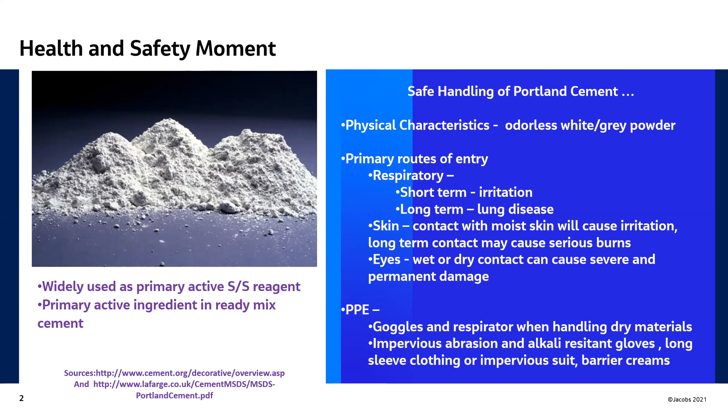So the main issue here with a dense aqueous solution is you don't know where this is going to upwell. You can almost think about the preferential flow paths being like blood veins. The challenge with this project was essentially that you could move 5 feet over and go from basically clean, from an arsenic perspective, to screaming hot with arsenic. So the variability of the sediments you'd be pulling up and putting into the scow, bucket by bucket load, was tremendous.

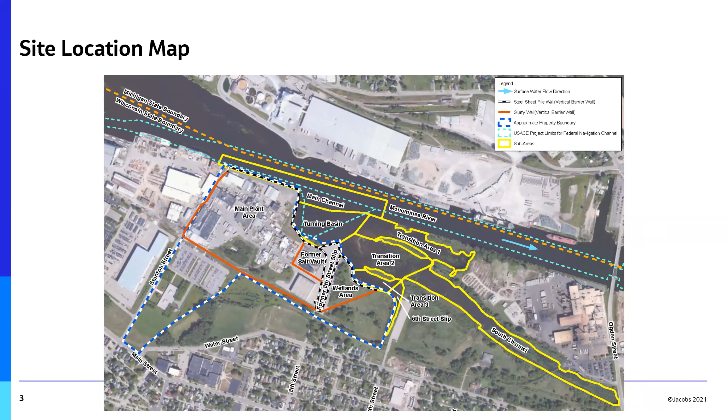So how do you effectively manage that in a remediation project where you're trying to take arsenic-impacted sediments, bring them to the dock, dewater them - and because we're very congested here, this was about 1.5 acres - export these to a municipal solid waste landfill with a non-hazardous classification? What that means in the United States is that your toxicity characteristic leaching procedure, or TCLP value, is less than 5 milligrams per liter arsenic. We needed to achieve all of that in basically 72 hours to get that stuff off site to avoid additional site congestion. Part of the challenge with this, as I indicated earlier, was the variability.

So we had two main sediments that we were dealing with: a soft sediment, which had a lot of organic matter in it, and what we called a semi-consolidated material. Both of these were sandy, silty materials, but the soft sediment had twice as much organic material in it, and as a result, it was very concentrated in arsenic.

So you can see the quantities to be removed based on the bathymetry, where the soft sediment in the turning basin was about 43,000 cubic yards. In the transition area, it was about the same - I hope you can see my cursor here - 42,000. But look at the concentrations, right? Dennis, can you right click it and get that other pointer option, the laser pointer here? Yeah, there we go. Right, so in the soft sediment we had about 86,000 total between the two main areas.

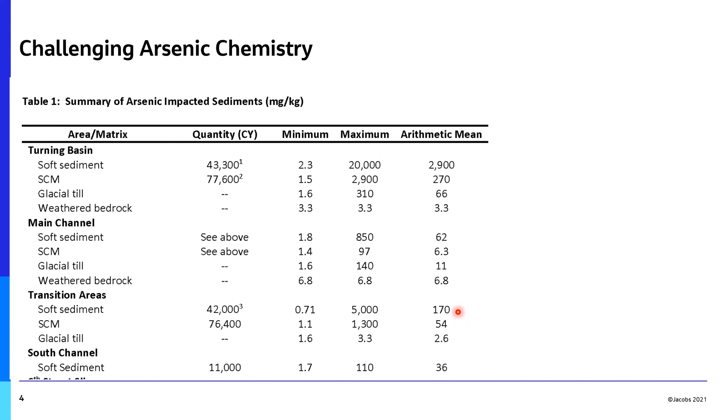The semi-consolidated material, which was more of a free-draining sandy material, had about 10 times less the contamination level. So you can see here, again, variability-wise, I have basically 2 milligrams per kilogram up to 20,000, with an arithmetic mean of 2,900. The transition area was not really that contaminated, but again, how do I know what I'm picking here? This was a really big challenge.

So chemically speaking, the two main active agents in Agent Blue were dimethyl arsinic acid and monomethyl arsonic acid. The solubilities of these were 2 million in the case of DMA, and in MMA it was 256,000 milligrams per liter. So I ask you, what are you going to do here when your TCLP limit is 5, right? These are enormous numbers. So it was a significant technical challenge to devise a method to get below 5.

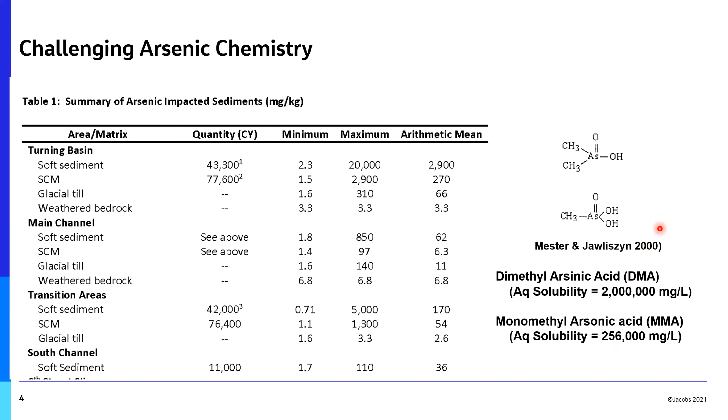So let's take a look at some of the physical and chemical properties of the very high moisture content materials, that soft dredge material. We picked 2 surrogate soils from an area called B6 and B4. They were almost liquid. The loss on ignition, which is an indicator of organic matter content, was 15 to 20. It was pH neutral, fairly plastic, and a lot of that had to do with the organic matter content because it classified as an SM.

But again, our average for this sample that we used for the treatability study was about 6,300 milligrams per kilogram. The B4 material was about 4,200. The semi-consolidated material, which was more of a well-graded sand or an SW material, these again were more freely draining, but yet you still had, even in a sandy material, up to 32 milligrams per liter TCLP.

In the case of the B6 material, you're about 34. So the challenge here is it didn't matter if you had a lot of fines or a plastic material or not, it was equally concentrated in both soil types. So you couldn't use just straight geotechnical characterization information to tell you what material you were dealing with and have that be correlated with the leachable characteristic on arsenic.

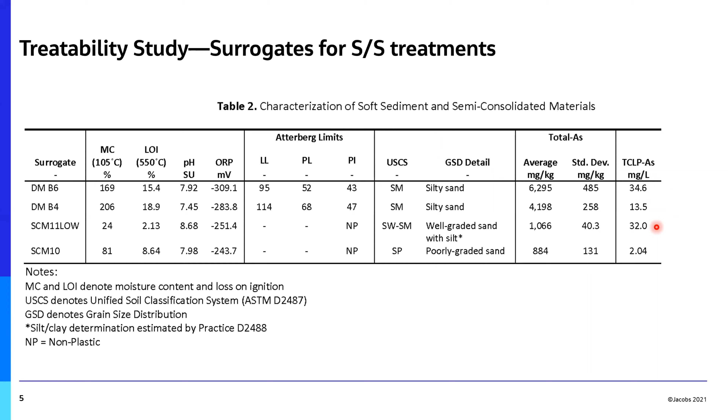So when you do a treatability study, what you need to do is mimic what's going to happen at the site. So if you don't model the site processes with your treatability study, you are going to end up with a solution that does not work in the field. I stress this to everybody. I lead a lot of treatability study work at Jacobs. And if I was to tell you the single most important issue that is always overlooked, it's making sure the treatability study mirrors the field processes. So what did we have to deal with material-wise?

The soft dredge material and our semi-consolidated material, both of these up to about 30 to 40 milligrams per liter TCLP arsenic. The site constraints, and this is where you transition from science to engineering.

We were only allowed to use 2 reagents because we needed a compact stabilization solidification system. We prefer dry reagents because we're obviously trying to dewater something with a moisture content north of 150 moisture points. We needed to ship the material off-site in 3 days, so 72 hours, to avoid congestion. We had 11 bins with 1,700 cubic yards capacity each.

And if you got out of cycle and you failed your arsenic criteria on those, the site backed up immediately. In fact, the site was completely shut down because all the bins were contaminated when they exceeded the TCLP limit when I joined the project. So the idea is to get that off-site as fast as you can.

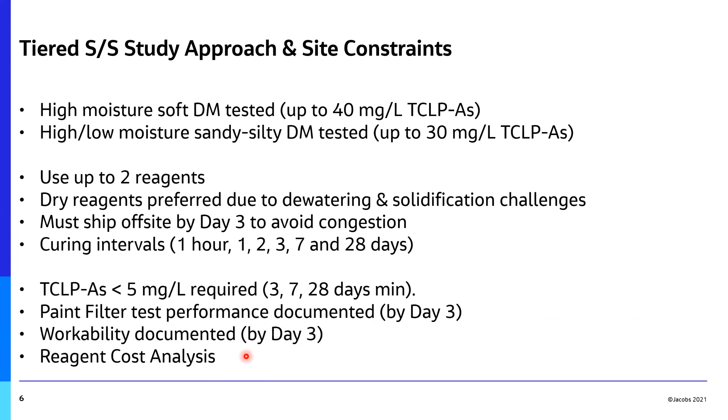And then the other thing that we had to do was track the dosing and the actual reagent unit costs with our dosing strategy. So the arsenic immobilization strategy, which was first and foremost, was that first we needed to understand what was happening in terms of the overall Eh, pH, stability of arsenic, right? Because we needed to ensure that it was going to remain immobile for the long period.

And what we realized is that the leading strategies for arsenic immobilization actually have combinations with iron. So when we superimposed iron speciation on top of this, what we realized is that we needed to be in this crosshatch region to immobilize the arsenic for our site considerations, which meant that we needed to be oxidized and we needed to be between pH 4 and 8.

Usually when you're working with a stabilization solidification system and you're adding cement, you're way over here in the pH 12 and a half to start the reactions. And for long-term stability, for most projects, you want to make sure that your pH is maintained above 10. That wasn't going to work on this project. And in fact, I will show you mix designs where we started with an initial TCLP of 40, and because we didn't get our pH right and we were strongly alkaline, we in fact doubled up to 80, which is no bueno.

So in terms of looking at reagents that we're going to be able to dewater a highly liquid material and to have combinations with iron and also sulfur, which is known to immobilize arsenic, we looked at probably 30 to 40 reagents. These are the top reagents that are listed here, and they appear in the papers in ASCE. And the key here, again, for tracking the reagent unit cost is, some of these, this one here, this EnviroBlend was $600 a ton.

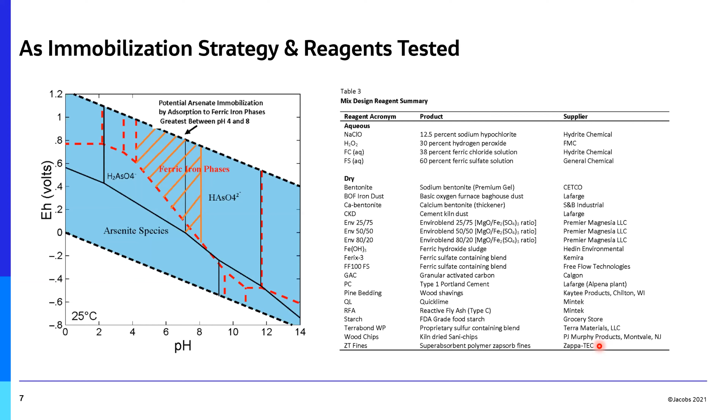Some of these others, this polymer-based thing is about $1,400 a ton, but you only need 1% of that in some cases, depending on your project. So you have to look at the reagent dose, right, times the unit price to track the cost. And that's what we had to do. So, again, challenging material, and we did probably 200 plus mix designs to nail down the immobilization of this arsenic and to find cost-effective solutions.

I wish I could hide this stuff at the top. How do I do that?

Because the key is up here, and what you see is we have our moisture contents that we're tracking in the leftmost column. We have our reagents, again, limited to 2, and our priority was to be adding iron into the system, and then if we needed solidification, to begin adding things like Portland cement. And then we track the paint filter,

ORP or Eh, pH, the TCLP fluid we were using, the ORP during TCLP, the TCLP pH, because that's the regulatory criteria, or one of them at any rate, the TCLP arsenic, right? And so green means you passed, red means you failed, and we needed to track that. We tracked it at 1 hour, 3 days, 7 days, 28 days, and then I'm showing you the reagent unit cost in the rightmost column. So let's take a look at a couple of these.

So here, we're adding aqueous ferric sulfate, which seems odd. Why would I add a liquid to immobilize a liquid? But in fact, all the iron is in solution. Dry reagents typically foul. So delivering and having iron in solution to react with that soluble arsenic is important, right? So in high water content stabilization challenges, we're often adding our reagents in aqueous form to enable the immobilization reaction to occur, precipitation, sequestration, etc. Then we have our Portland cement.

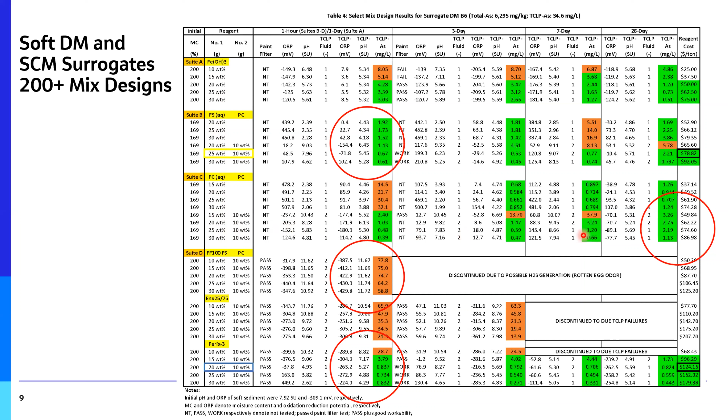What was also quite interesting was we used ferric chloride, which is from the steelmaking process, right? And that is also an iron acid with lots of iron in it. And so it was comparable to the ferric sulfate, but actually cheaper. So we ran that through the system. And what we found was, in fact, that was actually more cost effective, but you have to pay attention to the workability. And so let's talk about that for a minute.

When you're working with complicated systems, you need to have hands-on experience or somebody that you trust that is working with those materials, that is paying attention to how these systems are evolving. If you don't, you're going to pick something that doesn't work. Here is the ferric chloride. The fill line on the sediment was probably about 500 grams. We put that in there with the 30% ferric chloride, and it began oxidizing it and swelling it and poured over the edges, right? It turned the stuff into mousse, right?

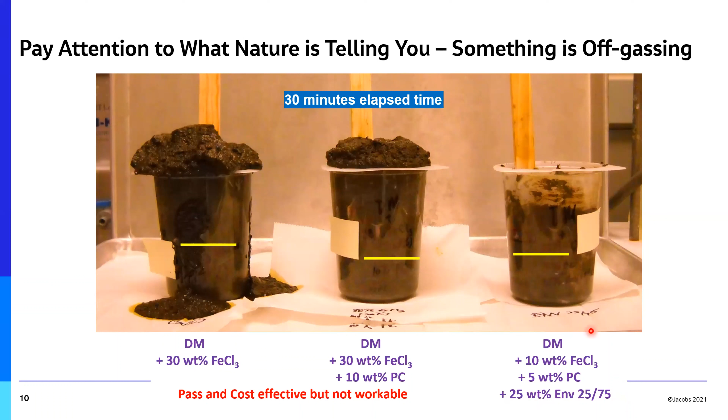We also looked at, because it was so cost effective, it with the Portland cement. That was still swelling to about 3 times the volume from its initial volume. And so that was rendered not workable either, right? Because how are you going to get this stuff off site? This was like a mousse. You couldn't handle it. By the time we actually got it to be a solidified material that was actually workable, we broke the bank on exceeding the number of reagents we had to use. So this got kicked out, even though it was the most cost-effective one there, but it wasn't workable.

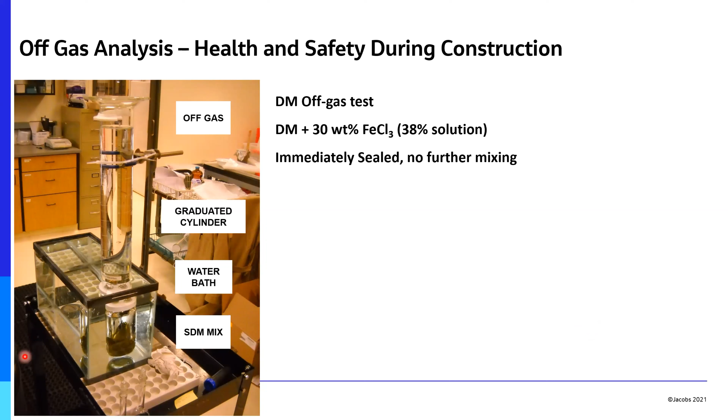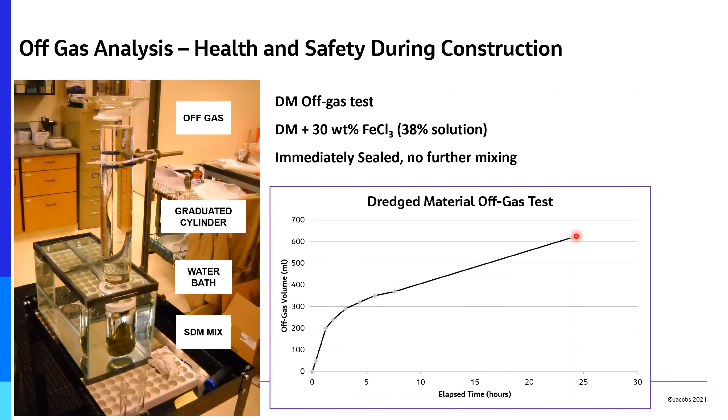The other aspect that we had to understand is, because it was ferric chloride, were we generating chlorine gas, which is why the site originally got shut down, because they were using hypochlorite to oxidize the arsenic. So here we looked at an experiment of again putting 500 grams of the SDM mix in a jar in a water bath. We looked at the off gas of that into a graduated cylinder. And at 500 grams, we were basically creating the same amount of gas volume, a little bit over 600 in this case, within a 24-hour elapsed period. So that would have meant that all the SDM sitting in the bins and going through the pug mill would have been generating chlorine gas potentially and shutting the site down.

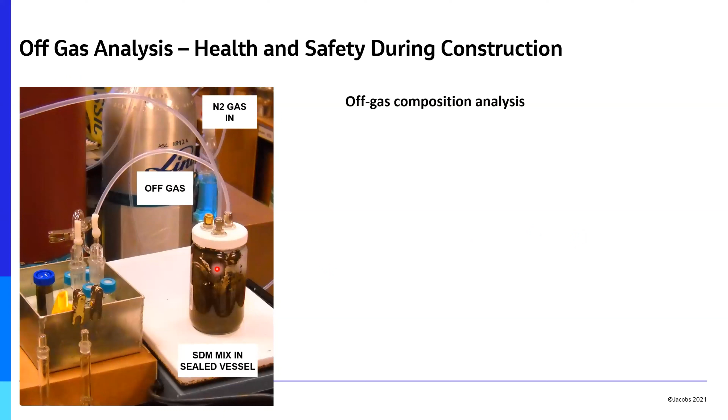When we actually analyzed what was going on here and the quality of that gas, we put nitrogen gas into the reaction vessel, we put the off gas through impingers to scrub it, and then we analyzed that. What we actually found was, in fact, we weren't generating chlorine gas. It was basically non-detect. That ferric chloride was so aggressive, it was oxidizing all the organic material in that dredge material, and in fact rendering it unworkable. We turned something that was a silty sand material into basically a mousse or a whipped cream that was no longer workable. So again, as I said, if there's anything you take away from this, make sure you're paying attention to what's happening to the materials as they react.

All right, so now we said, okay, because our SDM had different characteristics from our semi-consolidated material, we wanted to come up with conservative doses based on those materials and the expected concentrations of arsenic that may be in those. So we selected a dry mix, ferric sulfate source, and the wet mix.

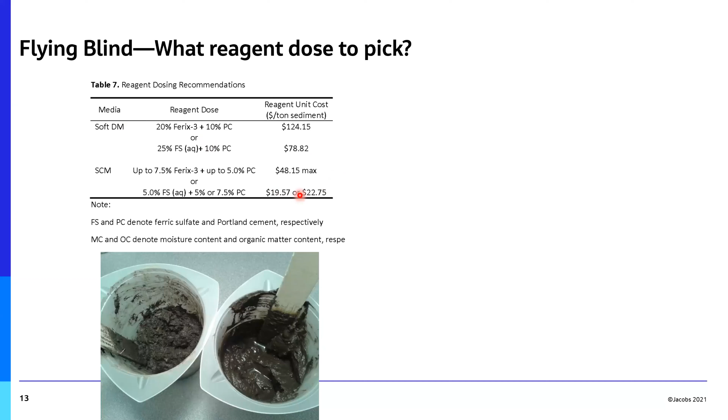But you can see here, depending on what you're going to get in the scow, you have a price between $19 and basically $124 per ton. And so when you run the numbers on that, we were going to treat 232,000 cubic yards or 348,000 tons of material in 2013 at a rate of 2,000 tons per day. So that was about 4 to 5 scows, 24/6 operations. So each scow is 500 cubic yards, and it can be highly variable in terms of what's in that scow.

Each storage bin was 1,700 cubic yards. If you failed a bin based on 3 TCLP tests on that 1,700 cubic yards, to empty out that bin, retreat it, put it back in the bin was $200K. If you then failed a second time, you had to go to hazardous waste disposal at $750,000 for that 1,700 cubic yards. So significant penalties here if you did not get your dosing right and immobilize arsenic the first time.

So, we were thinking we'd be using this Ferix-3 at 10% the whole time, or the aqueous one, but the problem was when you ran the numbers out, that was almost $27.5 million in reagent cost alone. I haven't paid for one guy, one piece of equipment. That's just the reagents. No landfill tipping fees, right? Just reagents. So what could we do to control that reagent unit cost?

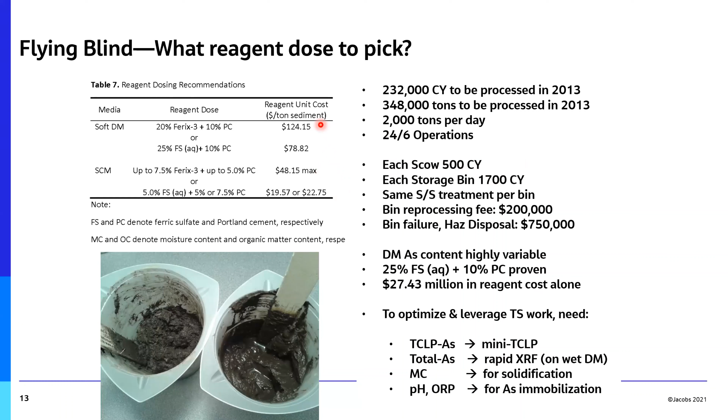So we devised a mini TCLP that we could use on-site with an on-site lab and do a rapid turn on that, so that in the decanting period, which was 6 hours for each scow to let the water come off, we would have a result and be able to say, hey, this is what dose you should apply to that scow on a real-time basis. So how did we do that?

The important thing to recognize here is that with sandy, silty materials that are natural in origin, or glass-like, or high in aluminum silicates, and not clay, these materials have very little buffer capacity. I actually picked up on this idea from Paul Lear, who works for a stabilization solidification company, because he was looking at lead leaching out of crystal, and he ran an acid extraction test very quickly and found that because glass has no buffer capacity, your pH after about 1 hour is actually the same as your pH at 18 hours. So all we had to do was rapidly acidify this material and then track the arsenic with time.

And what we found was, for the soft dredge material and the semi-consolidated material, in an hour, with the soft dredge material, I had virtually the same pH that I would if I ran that test for 18 hours. Well, that really condenses my time frame and allows real-time processing. The same thing happened on the SCM low. In fact, the numbers ended up being conservative on both of those. So that seemed to be the way out of the woods.

So again, looking at the analytical tests here, full TCLP with digestion or in a screening mode where you don't do the heating for the analysis, those were going to take 20 to 22 hours. That was not going to work because then we'd have all these scows sitting out on the water, not able to be unloaded. And if you sent that out to an external lab, you're talking about a 3-day turnaround time in your analytical data. That was not going to work.

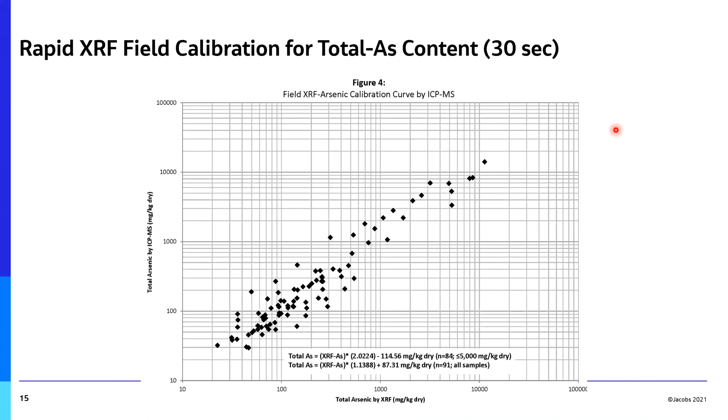For the XRF, we took a handheld device and calibrated that against the totals by the official procedure, and we came up with a calibration line. So now we know what the leachability is, we know what the total is, and this helps us, in addition with moisture content data, to figure out whether or not we have soft DM or semi-consolidated material, and we can begin dialing in or ratcheting down our dose to make things more cost effective.

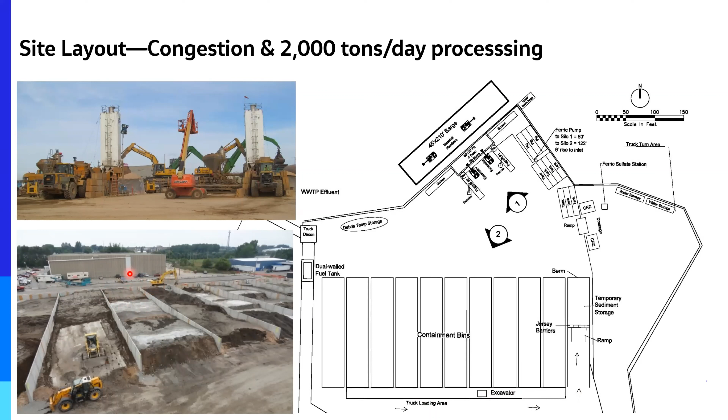So this is the backside. This is looking at the two excavators unloading. This is the pug mill system, and this is where the solidified solids come out, and then they are taken to the storage bins, each one of those being 1,700 cubic yards. What you see in the background is an excavator sitting on an elevated platform that can reach back into that treatment cell, take the material out, swivel around 180 degrees to the opposite side, and put the material into a truck.

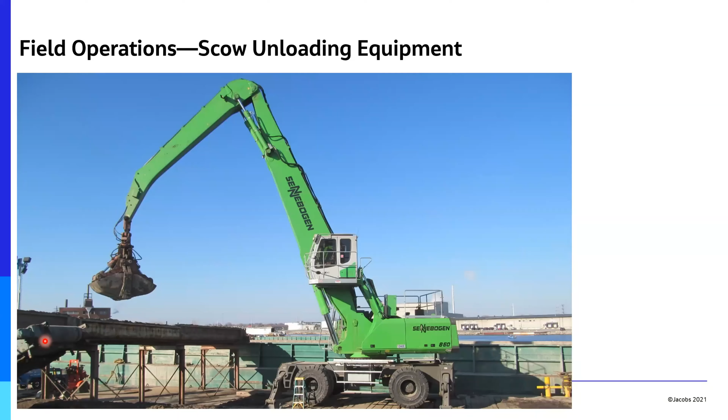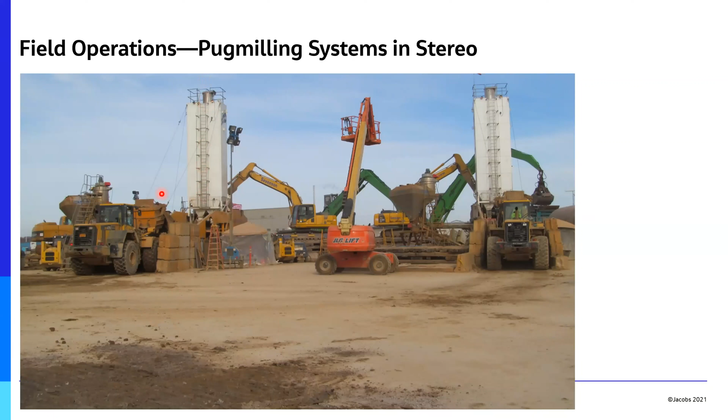So let's take a close-up of some of the equipment used here. This is a Sennebogen materials handler. This is what emptied the scow into our screening system and trash rack system before it went into the surge tank for the excavators, which are sitting here. They take the material out of the surge bin and drop it into the hopper for the pug mill. Here's your cement silo. The ferric sulfate came in on a different line; you can't see that here. And then these loaders took the material out.

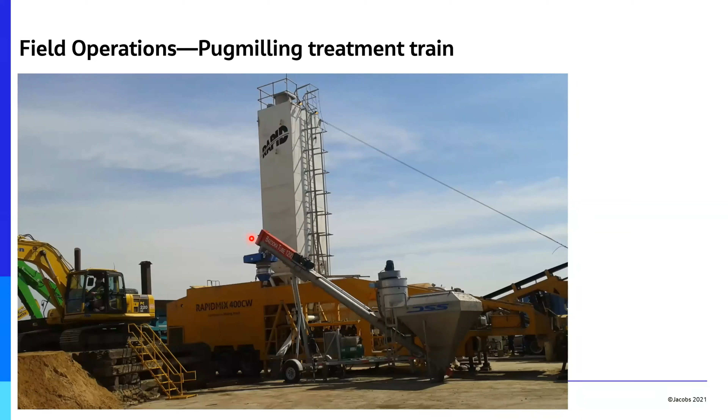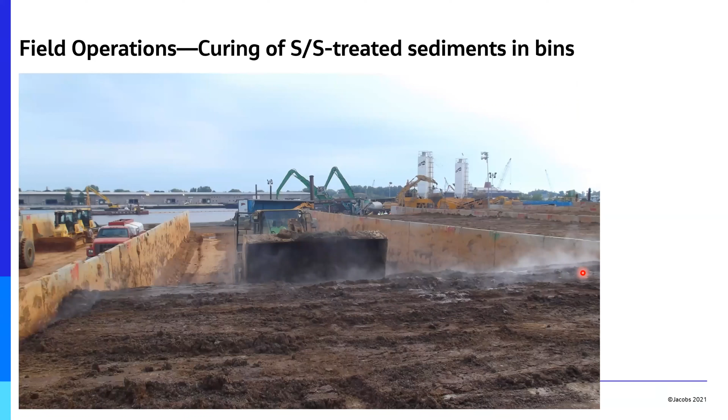This is the device that put in the ferric sulfate, the dry mix. And then here is a loader filling up a bin. This is steaming because the ferric sulfate, in combination with Portland cement, is very exothermic. So it's driving off a lot of moisture at the same time it's immobilizing the arsenic.

Now, here's the bin with the impacted material on the right-hand side. The excavator swivels around to the other side and fills up the truck that's going to the landfill. So it fills it here, then it goes through a truck wash system before it goes off-site to the landfill.

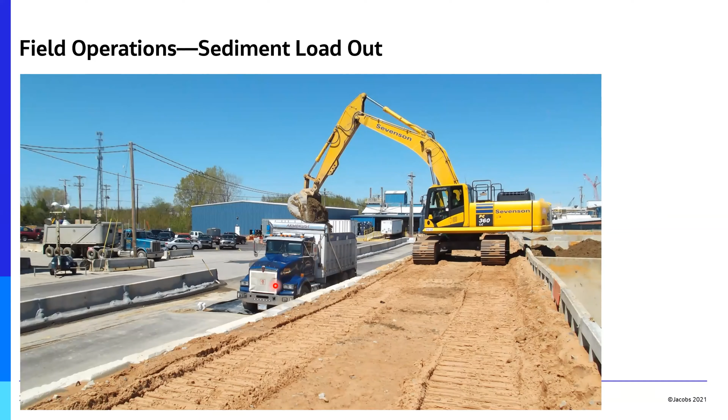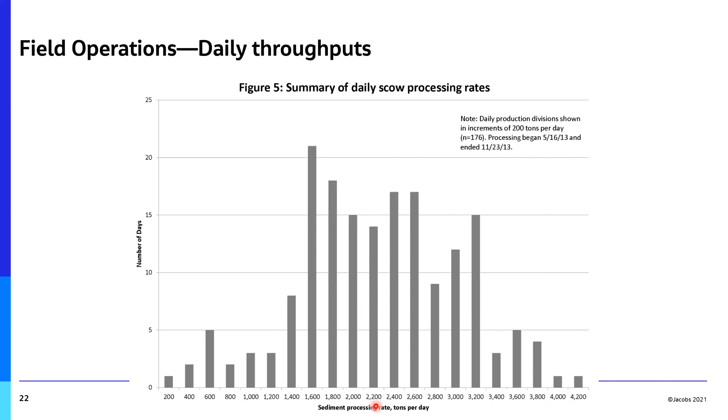So let's take a look at our processing now. Here what you see is we were working between basically mid-May to late November. And this is the number of days that we had various different throughputs. Our minimum was 200, probably a bad day, rainy, not able to process or solidify, up to some days moving 4,200 tons of material. That would have been basically 8 to 10 scows, which was a phenomenal throughput. But usually it was 1,600 to 3,000, probably an average of about 2,000 to 2,400 a day.

So very good throughputs. So how did we actually do our dosing? We've got these scows coming at us. They're going to decant for 6 hours. What can we do in those 6 hours to figure out how to dose that, get it through the pug mill and into the storage bin to start drying out?

So what you see here is this particular scow, scow number 29. We pull our 10 QA samples from the scow. We do the moisture contents. We do our XRF to get our total arsenic. We do our Mini-TCLPs in the on-site lab and get those averages here.

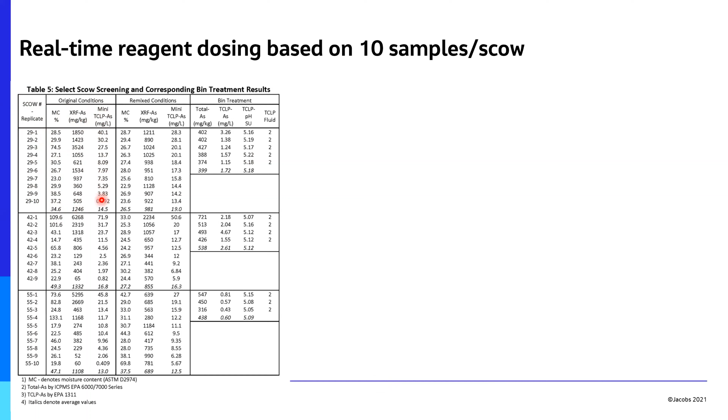As you take a look at this first one, we had moisture content from 23 to 75. Our totals were about 360 to 3,500. Our TCLP max on this one ended up being about 40, but you have a huge spread in terms of your TCLPs. So we were concerned that with such variation, what we really needed to do was even things out. So we sent this to be rehomogenized.

So they remixed it, we retested it. Now our maximum is only 28, our minimum is 13, so our average is 19. Our average has gone up, but it's a much more uniform distribution of materials, including the totals, which are much less erratic. This was 3,500, now our top value is about 1,200.

So now on the basis of this, we treat it with 25% aqueous ferric sulfate, 10% Portland, and here is our bin compliance testing before exporting for the site. So you see that we had basically 3.26, 1.38. Our average ended up being 1.72.

But if you had one failure on this, it had to be reprocessed, right? So our pH is, again, right in the middle of our targeted range, about 5.2. So this was a pass. After we rehomogenized the scow, let it sit for another 6 hours, brought it back, retested.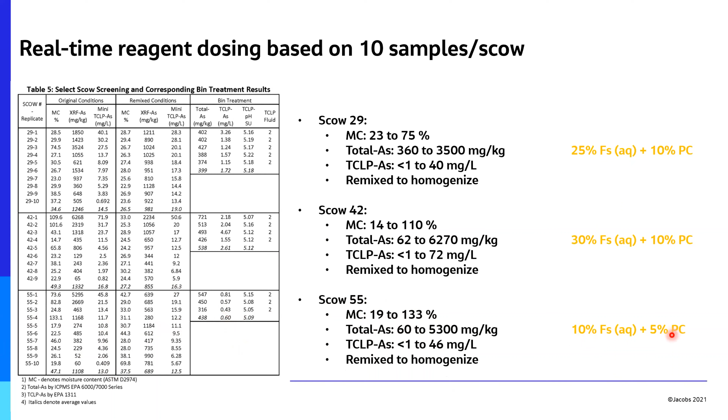So here's another one, scow 55. This was more of a semi-consolidated material, even though some of the moisture contents were actually a little bit higher. And what we were able to do with this one was hit it with 10% ferric sulfate and 5% Portland, which was our preferred blend for the semi-consolidated material. And again, that was a pass.

So let's take a look at some of the performance statistics. Here are the number of initial scow samples and their moisture content. So a log normal distribution on this, but we had everything from down to 10% to up around 700. So we had to track that.

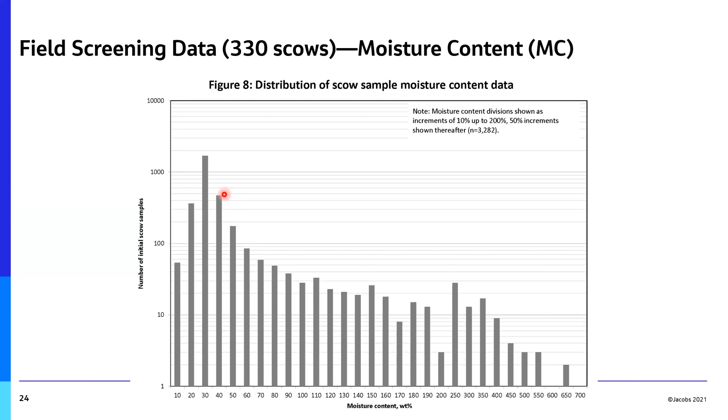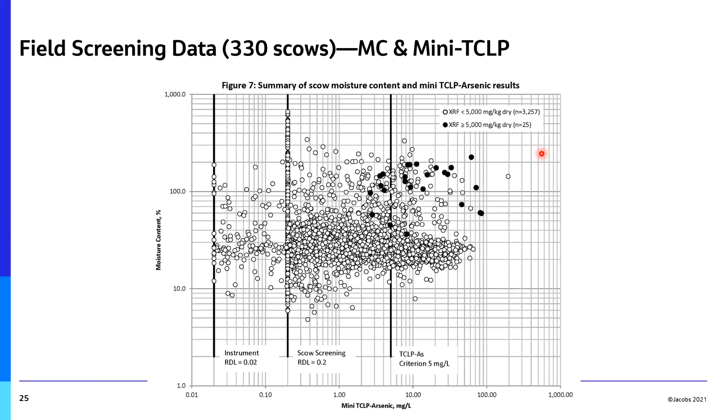This is the moisture content right from the scow as a function of the Mini-TCLP and our detection limits and our TCLP criteria. We had 2 correlations, as I showed you, for the XRF. The one that was over 5,000 was really for the soft dredge materials. So I'm showing you what those actual points were that were probably really soft SDM. And then most of the rest of the values were basically below 5,000 when we had our correlation change.

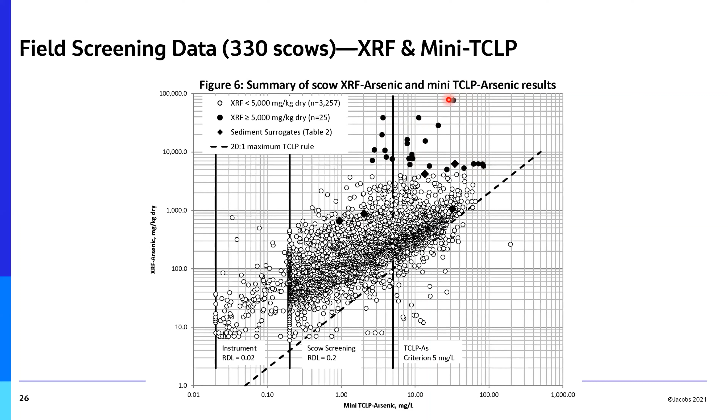So here is our XRF arsenic information totals versus our Mini-TCLP. What we're actually showing you in this diagram or plot is our sediment surrogates that were used for our treatability study. And at the end of the day, we actually picked pretty well. These are our 2, actually 3, soft dredge material samples, because we had another one mid-project. And then these are our 2 semi-consolidated materials. You can see we had a number of hits up here, but these are initial hits before reblending, right? So when you reblend those, you knock those back down and we were able to treat them.

This is the bin compliance data. Here is your total arsenic in terms of milligrams per kilogram, and here's your official TCLP arsenic.

Any single value over 5 milligrams per liter created a fail. We had 4 of those, which then meant we had to reprocess the entire bin, even though 16 of those samples were compliant from those same bins. Didn't matter—one failure, reprocess.

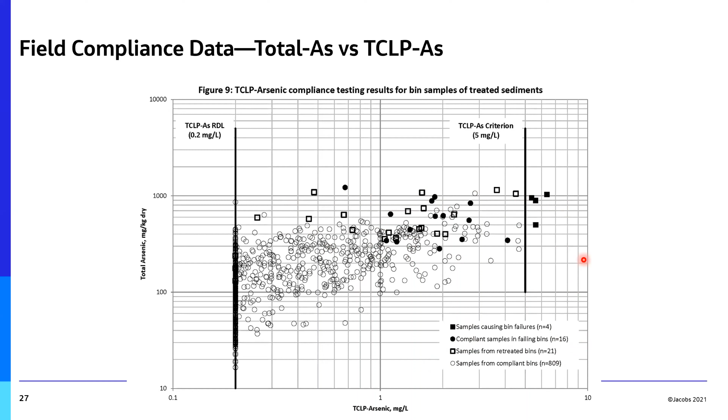After reprocessing, you can see all the open squares are what we did. In effect, all of the black solid samples shifted to the open squares and treatment was successful. We only had 4 bins that had to be reprocessed, none that went to hazardous disposal.

This is the summary of the actual dosing for the first, I think it was 190 scows or so, because they had to pre-purchase the dry ferric sulfate due to a world shortage. So at the end of the project, they began just using that to get rid of it and didn't have optimization with the aqueous ferric sulfate.

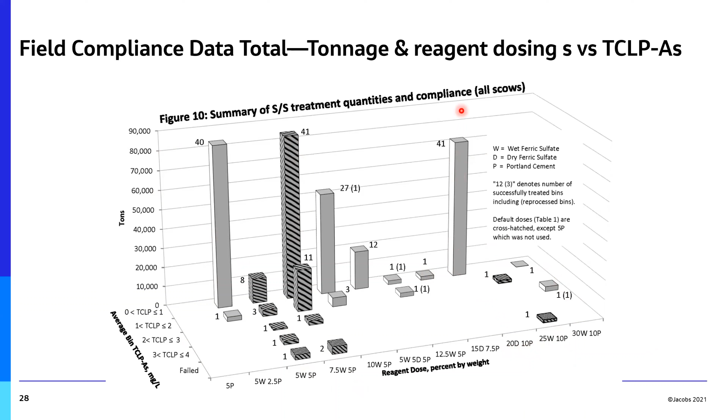Before that transition, these are the doses initially recommended from the treatability study, which are the crosshatched ones. The others are, as we gained more information and got more comfortable with our dosing strategies, we looked at a lot of intermediate and other doses—especially this 20% dry with 10% Portland, which was one of the best mixes we ended up working with across the project.

So in summary, we worked for basically 6 months, spring to just before US Thanksgiving: 232,000 cubic yards, or 330 scows, corresponding to 348,000 tons, or 198 bins.

That had full TCLP compliance on them. So 4 to 5 scows every day, 10 samples per scow, greater than 2,000 tons per day average processing, 24/6 operations. The highest moisture content was 650.

The highest total arsenic was almost 77,000. This is comparable to an arsenic ore.

We actually had a mining consultant working with us to help with the treatability study initially, because nobody had seen these kinds of concentrations at an industrial site. We were like, hey, we're in mining space, we need somebody to help us out here. So I spoke to a guy from Montana Tech, and he helped us understand that initial EH/pH diagram and dial things in.

The TCLP high, as I said, was 195, or almost 40 times the limit. So when you're in this territory, you don't have a lot of options, and we were actually very successful, thankfully.

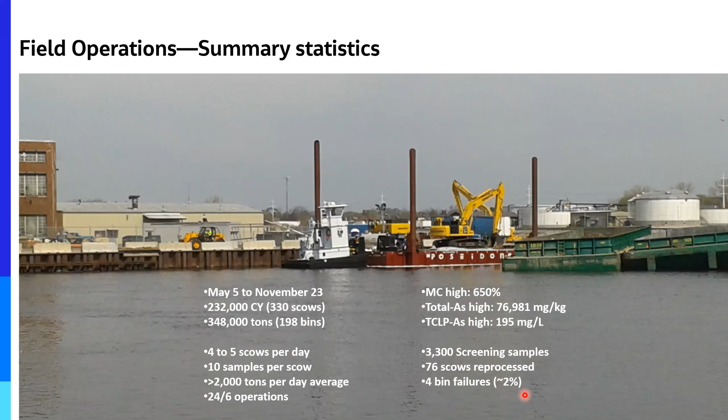3,300 screening samples from the scows, that's both initial and remixed. We had 76 scows that we reblended to knock the concentrations down, and four bin failures out of 198 bins, or just about 2%. If you're interested in more details, this is published in ASCE.

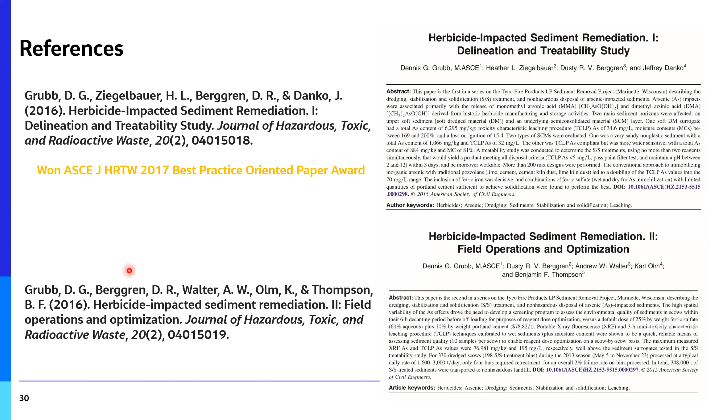The other person here was Heather Ziegelbauer—let me give her some kudos. She was the project manager, and Jeff Danko was the site construction manager. So again, just wonderful colleagues. This was a fascinating project, and I am so relieved that we got this done. And with that, I think I'll take questions.